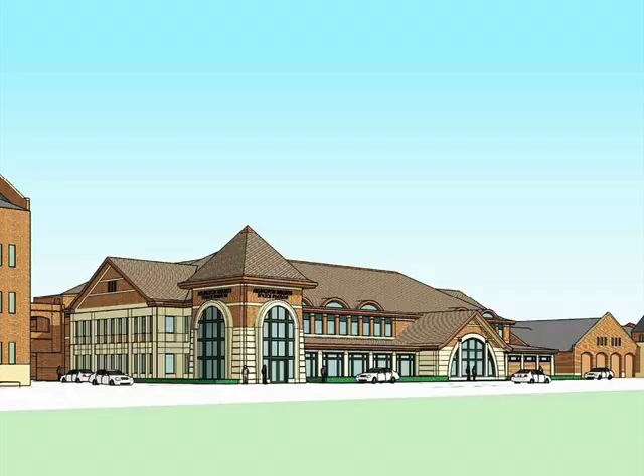Next, under new business, a very important item in the history of Arlington Heights: amendment to the PUD ordinances for construction of a brand new police station here in the village of Arlington Heights. A long-awaited evening for all of us involved in this process, particularly the staff, and so I want to turn it over to Mr. Recklaus, as the village is the petitioner in this item.

A couple of quick comments before I turn it over to the design team. This is obviously a unique situation where the village is the applicant, but I can assure you we stand by our rules and procedures, and we are following all of the same rules and procedures in the same manner that a private business would in an application. It actually was kind of a fun process in that regard. I think a few of the departments enjoyed being able to have Charles on the other side of the table and put him through his paces. But we're very happy with how this process has gone.

Charles and Deputy Chief Pecora, along with staff from police, planning, and public works, and our design professionals that we've hired, have put a lot of work into this. We've had check-ins along the way with Trustee Tinaglia and Trustee Glasgow, and what we have is what we believe to be a very efficient, very functional, very cost-effective facility that we think is going to fit in nicely with the neighborhood and serve our police department for decades to come. But with that, I will turn things over to Charles, who will kick things off.

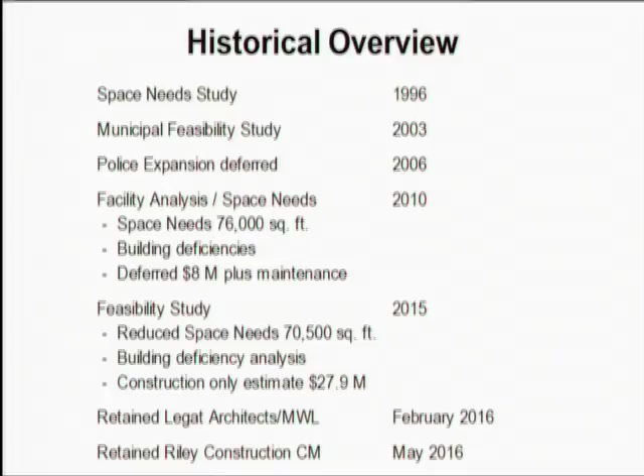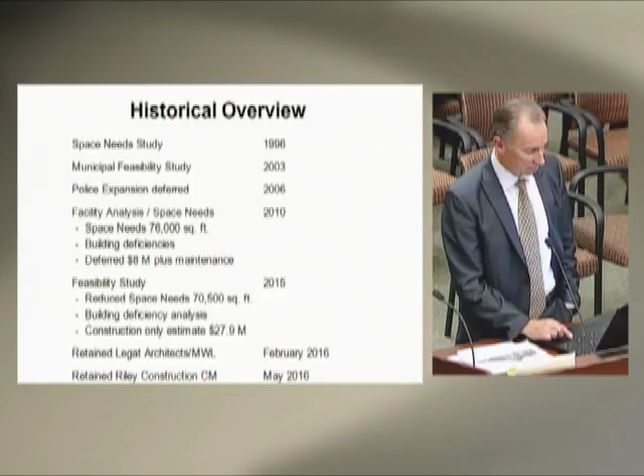The project was still placed on hold, and then an additional study was done in 2015. We were able to work with the consultants at that time to bring down the size of the facility to approximately 70,500 square feet of programmable area. Consultants at that time did concur with the building deficiencies that were identified in the 2010 study. Then last year, the board recommended approval of hiring and retaining Legat Architects and McClaren Wilson Lawrie, who specialize in police stations, and also Riley Construction as a construction manager.

So throughout all those years, we've had many, many meetings, public meetings with the neighbors. But more recently, I'll fast forward to December last year, we had a status report with the village board. We then went to a preliminary review with Design Commission and also subcommittee of the Plan Commission. Then in January of this year, we mailed notices to over 200 property owners, held a neighborhood meeting. And then also in February had the formal Design Commission hearing and the Plan Commission public hearing, and again did that same mailing to over 200 property owners.

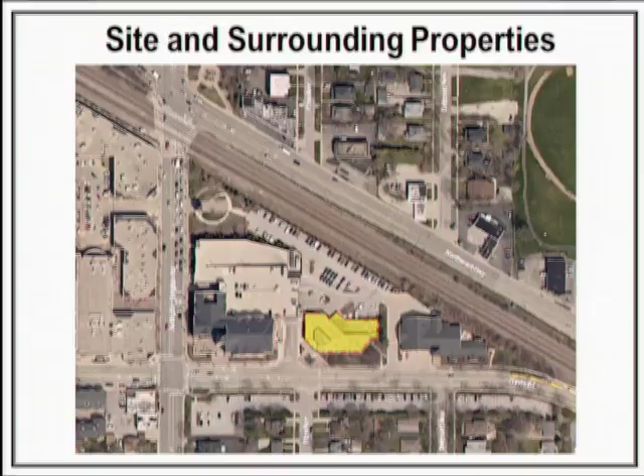The site, as you're aware, is constrained. It is bordered on the north by the railroad tracks. To the south is Sigwalt. This aerial identifies in yellow the existing police station that was built in 1978, and it is between the existing Village Hall and Municipal Parking Garage on the west and the new fire station on the east.

At this point, I'd like to turn it over to Deputy Chief Nick Pecora, who's going to talk about some of the deficiencies within the police station right now.

Thank you, Mr. Perkins. Good evening, Mayor and members of the board. It's my pleasure to present the next 5 slides. It'll give you a little bit of a story about how the police department has not met our needs for a current police station. As Charles just indicated, we're at 38,000 square feet, and our neighbors have built police stations that range between 70,000 and 79,000 square feet, and they have similar full-time employment.

When the building was built in 1979, 1980, we had 80 employees. We now have 139 employees that call the police department home.

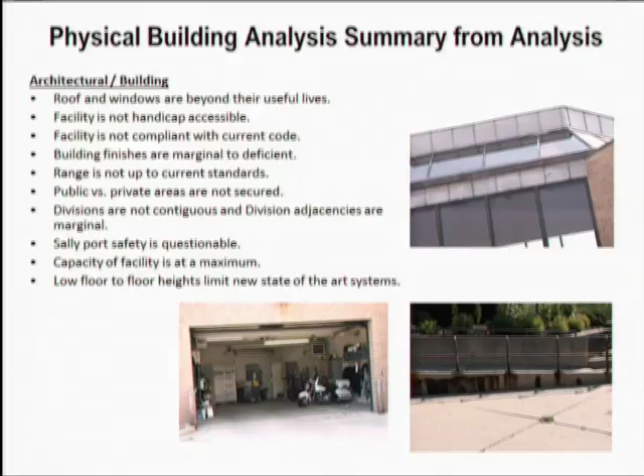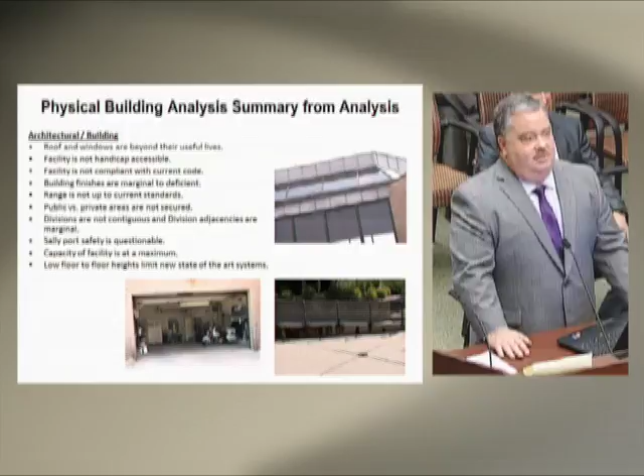The picture on the lower left is our sally port. That's primarily used by police agencies to bring in a squad car when there's somebody in custody. The garage door closes and then we escort the person into the lockup, which is the door in the middle of the picture in the back. You can see that we use the sally port for storage - there's 4 motorcycles in there, 6 police bicycles, forensic gear in the back, and ancillary storage on the left. It presents a unique problem when you have somebody that's not cordial, and there's lots of trip hazards involved, and it doesn't benefit us well to have that gear in there.

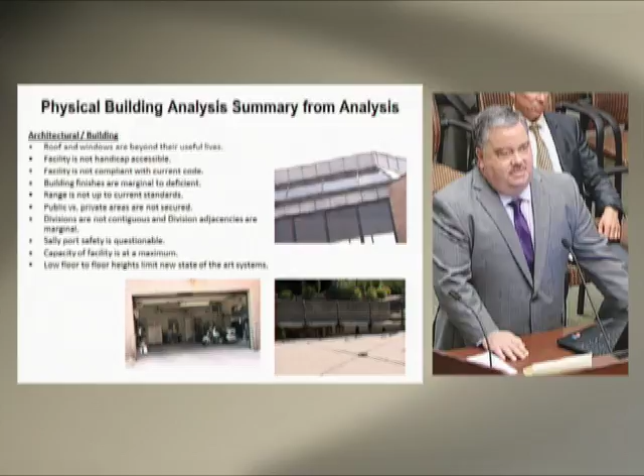The picture on the right, that is our front approach. That's the only handicap accessible point that we have in the building, and you can see the railing is starting to rot at its post.

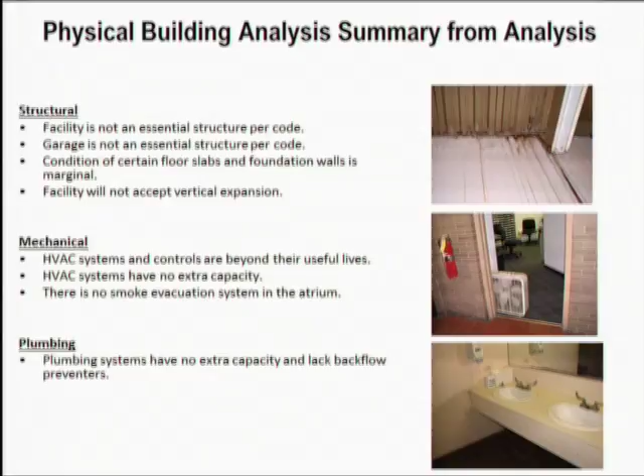Last year, we started to smell sulfur in the building, and we found out that the ventilation stacks were cracking. Instead of venting the sewer gases out through the roof, it was venting out into the building.

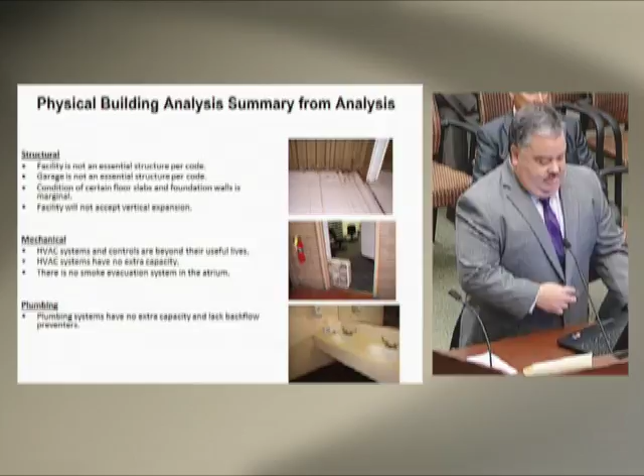This picture shows, hard to see, but you can see the spaghetti in the ceiling. When we started running the technology through the building, there were no wire trays, there were no chases. So the low voltage contractor that came in popped open the 12 by 12 tongue and groove ceiling tiles and was unable to put them back. So we have numerous holes in the ceiling so the contractors can access the wires should we need another network drop.

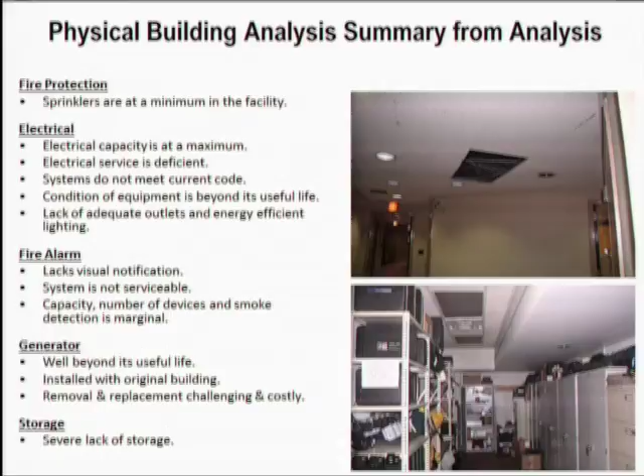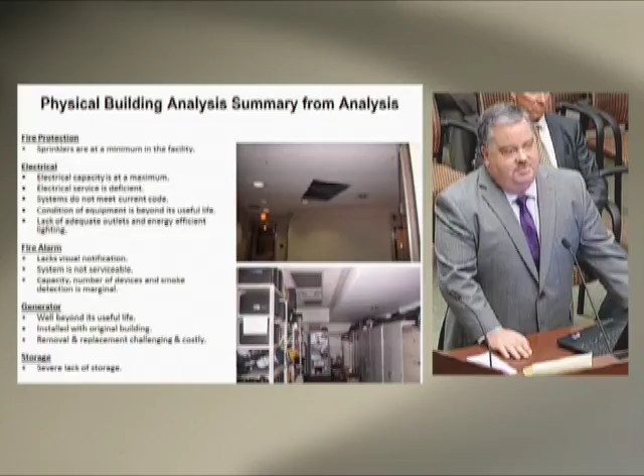And this picture on the lower right-hand side is the last 10 feet of our roll call room. It used to be 30 feet long. As we introduced more technology and needed storage, we took the last 10 feet and built a storage cabinet. It's technology like the AEDs that you see in there, they weren't around in 1982. Portable breathalyzers, portable laser, speed control devices, technology we need to keep secured and make sure there's accountability. We had to build a storage room.

Repurposed room, upper right-hand corner. When I started, that used to be the dark room in the lockup. When we used the old black and white 4x5 negatives to take booking photos, they were developed back there, and then the black and white photos were developed there as well. With the advent of digital technology, we didn't need a dark room anymore. So we plastered up the door in the lockup and cut a hole into the wall, into the hallway, and now this is our traffic unit.

Around the partition there, that's the sergeant's area, and the area here in the foreground, we have 3 police officers and 7 public service officers that call that their workstation. You can see the crude ventilation system we have there, a portable air conditioner that's vented somewhere up into the ceiling, and then the exhaust is then put in front of, or the air conditioning is then put in front of the fan and then circulated around the room.

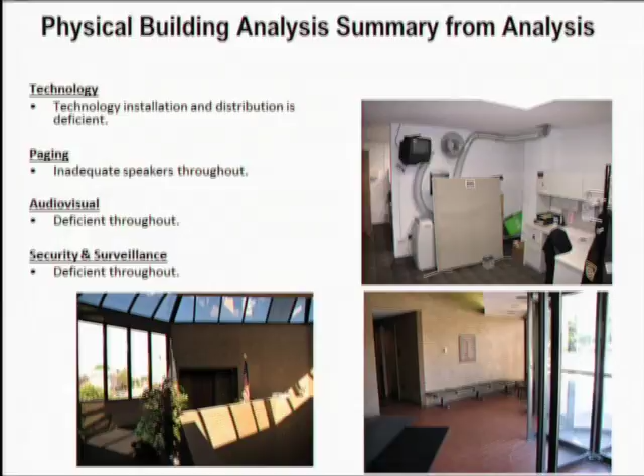The picture on the left is our second floor atrium. It just shows that the windows are starting to fog up a little bit, a little hard to see in that picture. Just more how the building is starting to degrade. And the picture on the right is our lobby. The revolving door and then the window curtains on either side of that are starting to lose their structural integrity. And when it rains, we get a lobby full of water.

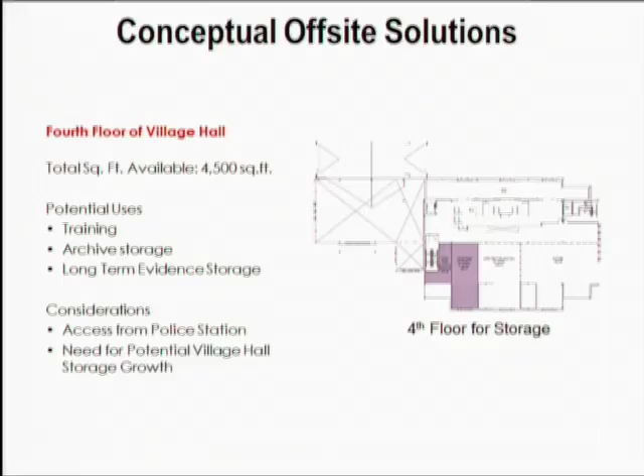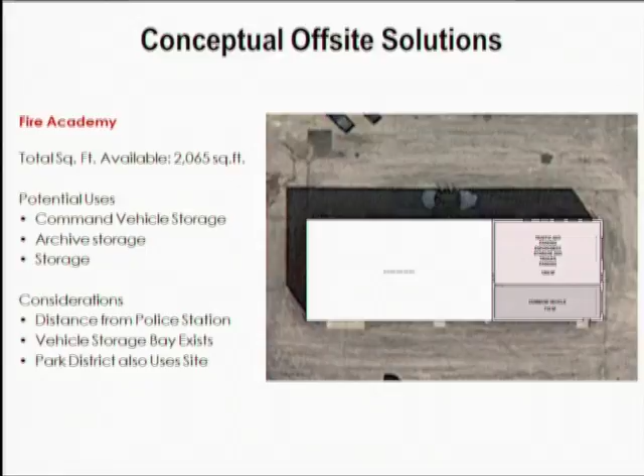These goals are on our website as part of the study, but I wanted to highlight them again this evening. We were charged in that 2015 study to look at using some of our existing facilities, and there are still 2 small components of this project where we're doing that. We're currently designing and bidding renovation of a portion of the 4th floor of this building to allow for archival and long-term evidence storage here, and also off-site in the former Fire Academy building, now called the Police Annex. We'll be renovating that space for seasonal vehicles, motorcycles, and additional archival storage. That allows us to bring the square footage of the building down from the 2010 study to what we're proposing today.

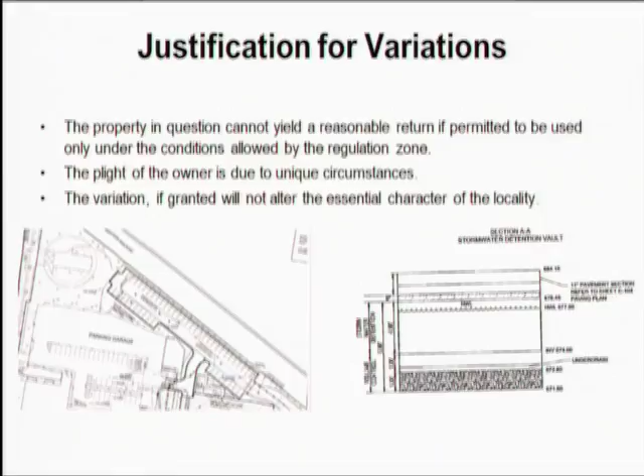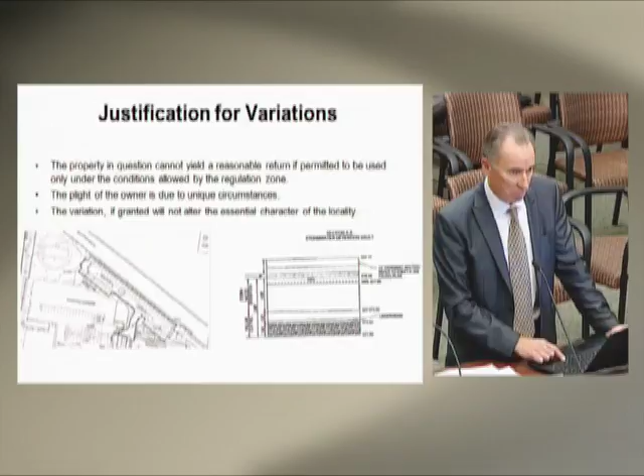There will still be a row of landscape trees along the railroad tracks as there are today; those will be replaced. But right now this site has zero on-site stormwater detention, and as part of this project we'll be providing stormwater detention and some regional benefit for the neighborhoods to the south.

This exhibit shows the proposed footprint of the building between the existing fire station and existing garage. The main change people will notice is the reconfiguration of the driveway. Currently there are 2 exit lanes and 1 inbound lane; we're proposing 1 exit lane and 1 inbound lane so we can make the building a little wider and provide a sufficient sidewalk from the parking area for customers who park in the garage to reach the front door of the police department. Right now there's about a foot-wide sidewalk, if you can call it that, by the stair tower of the municipal garage. It's not very friendly for the public who park in the garage to reach the front door. There are also numerous conflicting traffic movements for anyone entering the garage, and this actually cleans up that traffic movement for customers coming to our building.

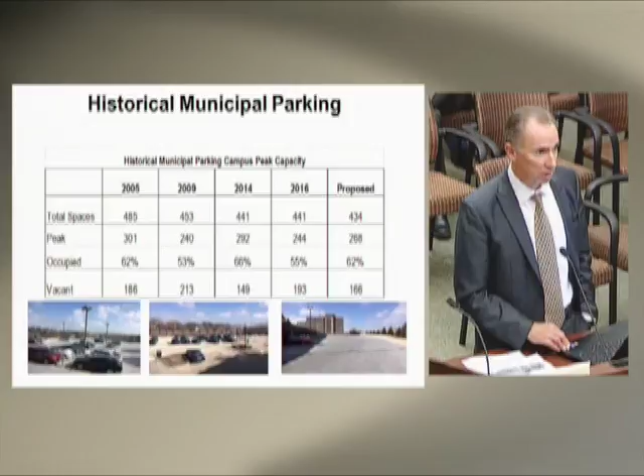On the bottom line here, you can see in each scenario there were hundreds of parking spaces still available. In 2005, we had a higher parking count and higher occupancy. That was prior to the Vail Avenue Garage expansion occurring, when there was a large shift of commuters from this building to the Vail Avenue Garage.

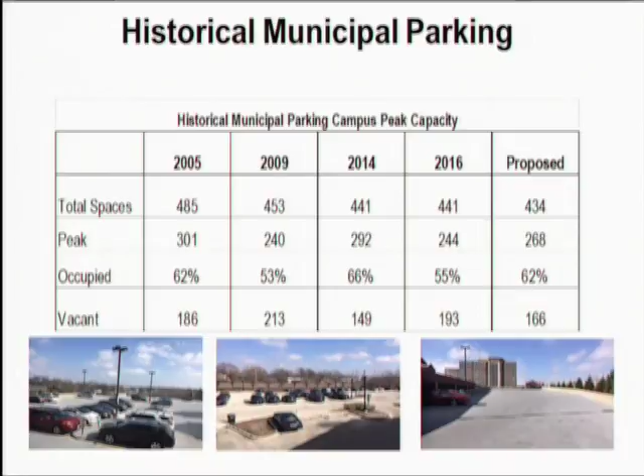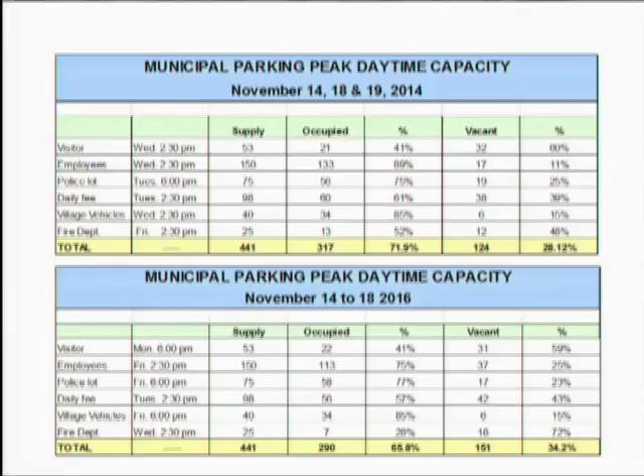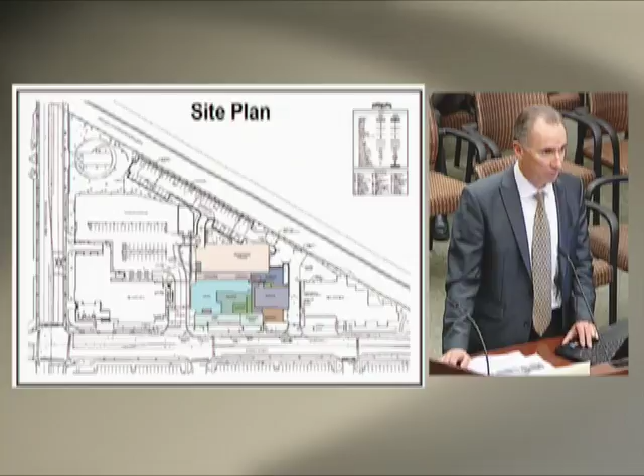Also, keep in mind that not all department employees are on site at one time. The peak shift, day shift, is 60. In the most recent studies in 2014 and 2016, we took, again, a worst-case scenario. We assumed every different parking area, so visitors, employees, daily fee, they all were at maximum, even though they were at different times of the day, and we assumed that was the peak maximum, and we still had 124 and 151 vacant spaces.

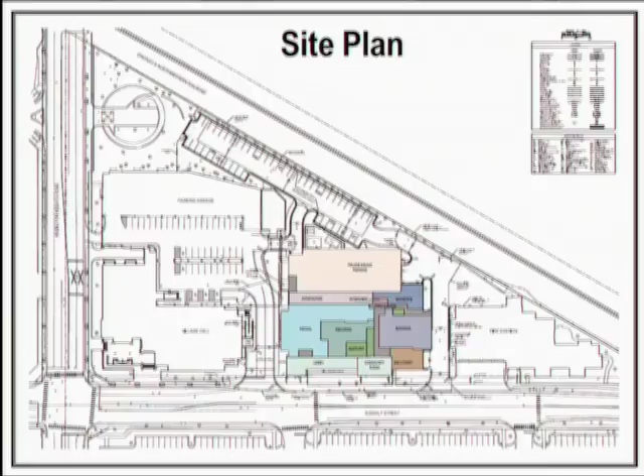Good evening, everybody. As you can see, the site plan has not changed significantly since we last presented to you a couple months ago. As Charles mentioned, we are using every bit of the site as we possibly can to fit the building on. We have rerouted the driveway into the parking garage, straightened it out and pushed it a little bit to the west, which would allow our building to expand as far to the west as we can. And we've done the same thing on the east side, the road between the police department and the fire station building. So we've expanded completely west to east. We've held it just north of the Sigwalt setback line, and we've managed to fit everything on and meet the program.

The one thing that has really changed since we last presented to you was that we have determined, after a lot of analysis, that the existing stair tower in the southeast corner of the garage is remaining. We had done numerous studies of using it, not using it, taking it down, et cetera. We determined it's best to leave it. So the police department staff will enter the building from that stair tower, but at the same time, there will be complete separation from the public, doors and access and all that. So we feel that's really the only thing that's changed significantly.

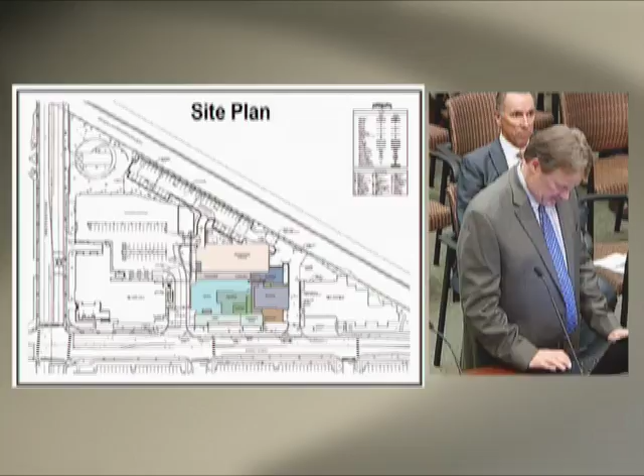Starting with the floor plans, I'll go over these briefly, and we can certainly go back to them, but I know you've seen these before.

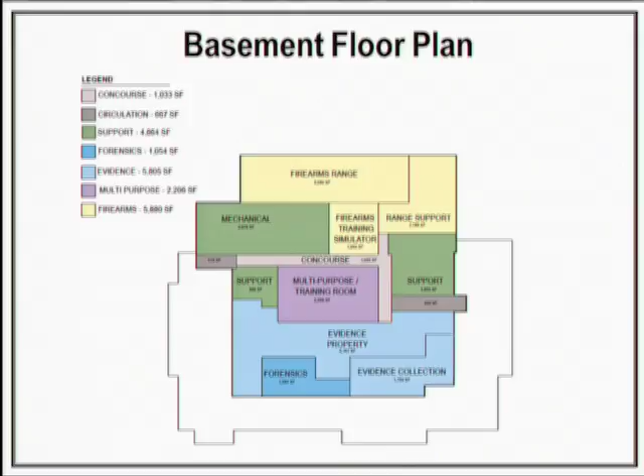The concept has stayed the same, where the basement is really sort of the training area, so we've got a multi-purpose training room down there. Most of the evidence is down in the basement. In the upper right corner, when we get to the first floor plan, you'll see the evidence intake, but most of the evidence is brought down through a secure elevator and stored along the south and southeast corner of the building. We've got mechanical space. The firing range is basically underneath the patrol vehicle storage, range support spaces, and storage.

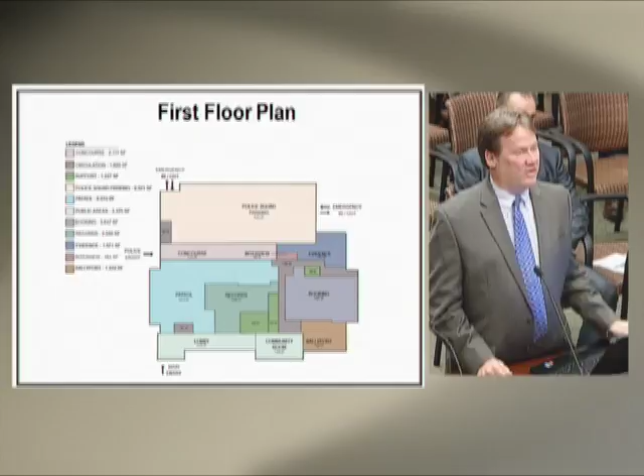It sort of fits in, being kind of the middle building, so it's set down a little bit, but it's a very welcoming, inviting space. The element will be lit up at night. It'll give a different look. Like if you pull in here tonight, the police station is virtually dark. We want the police station to read as a beacon. So the front lobby that you see across the screen there, the community room, and that main entry will all be lit up at night and provide a very nice environment.

You can see patrol takes the left half, records to the right. We've got the booking area, all the jail cells, if you will, the Sally Port at the southeast corner. Doors are facing east to the fire station. We're going to make those historically correct doors, since that will be visible from Sigwalt Street. As I mentioned, the evidence is up in the upper right corner, and the doors are facing north. And there is a concourse that travels west to east, separating the police parking squad area from the rest of the building.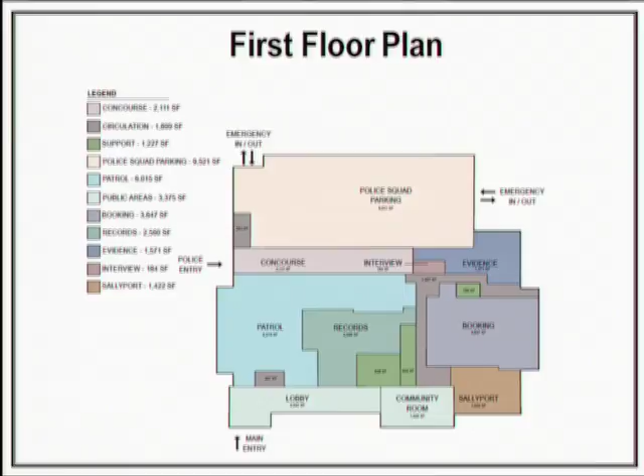Moving up to the second floor, over the parking structure, we've got the men's and women's locker rooms with the fitness room between them, with natural light looking to the north.

We've got a smaller version of that concourse upstairs, and then the administration area takes the bulk of the southwest portion of it, with the detectives or investigation area along the right side, and community services facing east towards the fire station. We've got a break room and break area that will serve the entire facility upstairs.

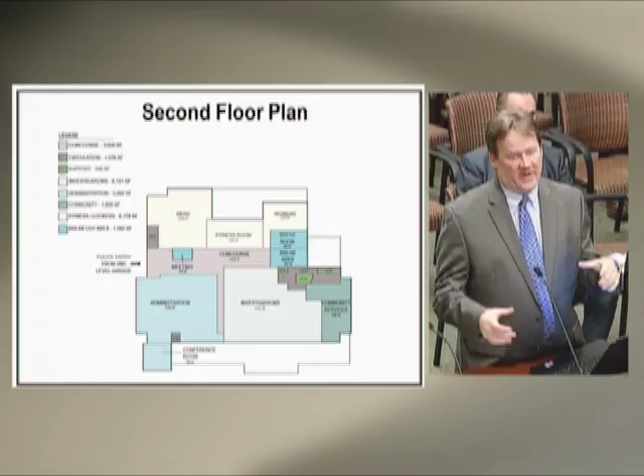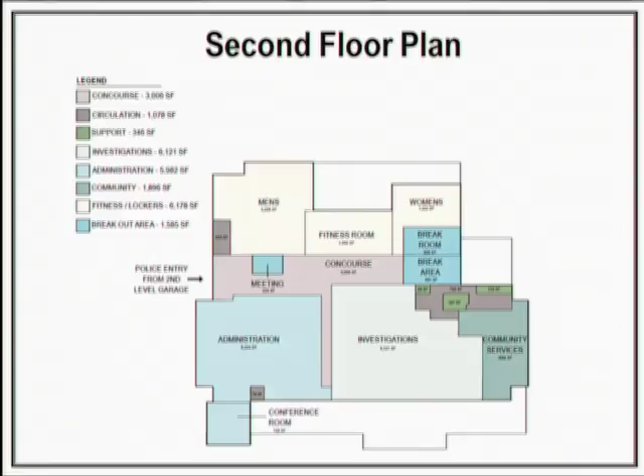You can see the space that doesn't really have any color - that's the roof of the lobby area below. The tower element comes up 2 stories, and we've provided the second floor conference room in the tower, and then the rest of the area is just a 1-story space. Roof plan, I think that's fairly self-explanatory.

I think I can turn it over to Steve now to kind of talk about the style and the context.

Hello, as you can see, we're trying to design a 2-story building that's going to sit between a 4-story village hall and a 1-story fire station. The massing of the fire station with the taller roofs brings it up to about a story and a half visually, and the towers in the village hall bring it up to feeling like 5 stories.

So what we're trying to do is create a building that is complementary but contrasting, just in the materiality, so that the stone, brick and roofing have similar features to the existing campus on the east and the west. But rather than give it a consistent look that makes every building feel like a carbon copy of one another, we're creating the historic look while giving it a unique character, using the arched forms, the sloped roofs, and the roof massings.

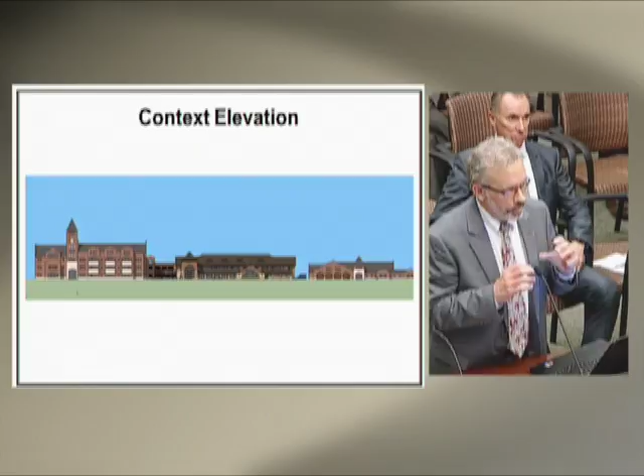We're trying to take a building that could have been a very tall 2-story building and break it down into scale by having a 1-story lobby along the street on the south on Sigwalt, a 2-story tower, and then the building behind, which is 2 stories, with the roof sloping away to keep the volume down.

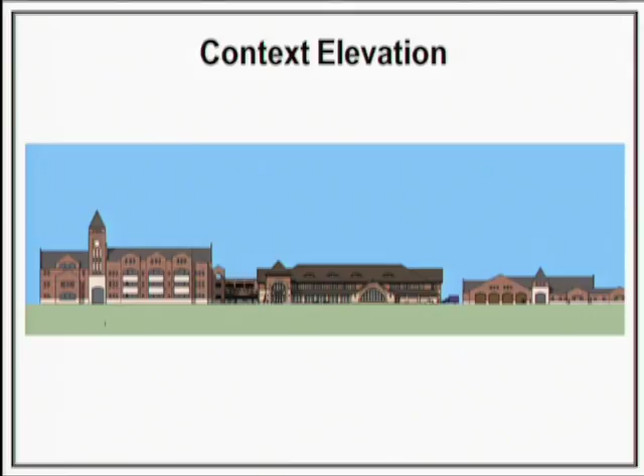I actually can't read these numbers, but I can tell you that the height of the peak of the roof is about 51 feet. We're 24 feet to the underside of the eave, and 33 feet to the underside of the eave of the tower. We're keeping the entire building below the height of the 4-story volume of the village hall to its west.

And you can see that as you're going around to the east elevation. I actually want to go back and explain these elevations too as well. From the south, this is the view from Sigwalt. The tower is 2 stories, with an entry and vestibule at the bottom, meeting rooms on the 2nd floor, and a sloped roof above.

The larger arch shape that you see to the right in the south elevation is the big meeting room - it's a 1-story space with a taller ceiling. The area in between is a 1-story lobby that connects the 2 volumes, and the remainder of the police station activities are in the 2-story area behind it. There are some eyebrow windows bringing light into the open plan offices, which are falling behind the office windows on the south.

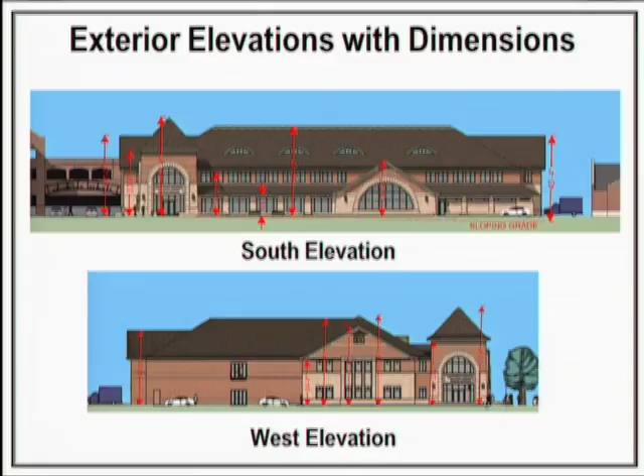On the east and west elevation, we're treating it similarly with the gabled roof, with windows aligned with a symmetrical bay at each end. So you can see the east and west have a similar look in the gabled area. Now, as you go to a certain point beyond where it's less visible from the street, we're using more masonry in the back of the building and less stone.

On the north elevation, we're using roof volumes that are visible from afar, from the distance, from the north, and from the railroad tracks. But you can see that the simpler volume at the bottom of the drawing in the north elevation is the squad car storage garage area.

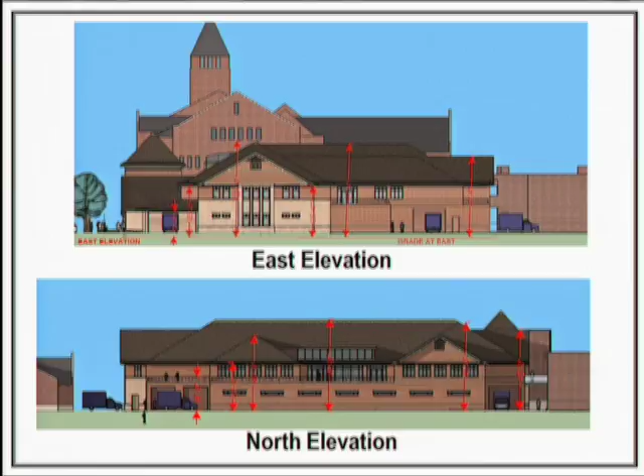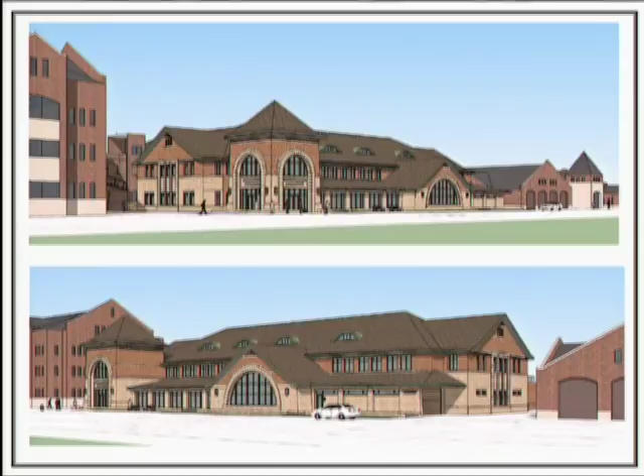To the right is another gable form. As you can see, the building is stepping back. The face of the building you see is aligning with the 10-foot setback, and then the rest of the volume of the building is 15 feet beyond that.

So we're trying to avoid having a tall volume right up against the setback along Sigwalt. The view from above gives you a better sense of how it's broken up: essentially a large rectangle in the center with a lower one-story volume in the front, and two wings in the back for the locker rooms and the workout area in between.

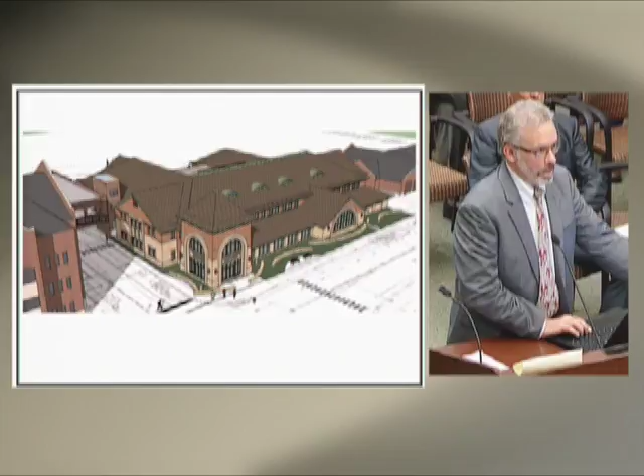We've got heavy landscaping, and the planter walls are doing more than just being decorative. We'll have lots of plants around them. The walls will be a backdrop, but they're also creating a security barricade without looking like one. We've been able to prove from past projects that they've been very important in stopping certain attacks on police stations.

The view from above shows the tall central volume in the middle, with wings coming out separating the men's locker area on the upper right from the women's locker area on the lower left, and a common workout area in between. You can see the police garage is the volume at the lower right-hand corner that we're building over the top of, which allows for future expansion if needed.

And then, do you want me to keep going on landscaping, or just keep going?

Briefly, we're landscaping the site fully. The setback line is the area between the paved sidewalk—actually, a heavily landscaped area is the setback zone. And then we've recessed back the lobby a little bit from that area.

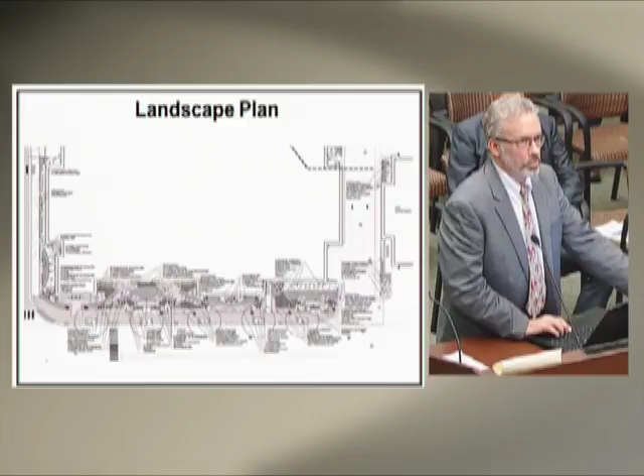We're landscaping on the east and south predominantly. And as you go around to the back, we're putting a rock garden with some planting underneath the garage edge, and then we're screening around the mechanical.

The mechanical area in the back is actually not going to be tall walls, but is recessed into the ground with a grill over the top. And we're landscaping the back very heavily with a row of trees along the railroad tracks as well.

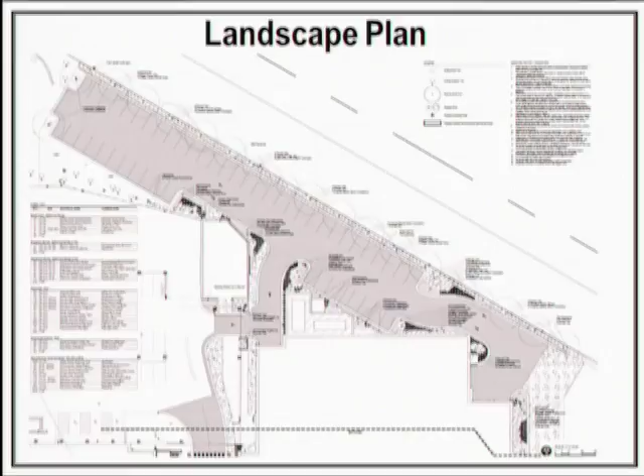Some of the amenities: we're basically taking the streetscape that exists on the two other buildings and bringing them so that it's very consistent and uniform along the front of the new police station. We're showing some of the elements that'll be used that repeat those forms.

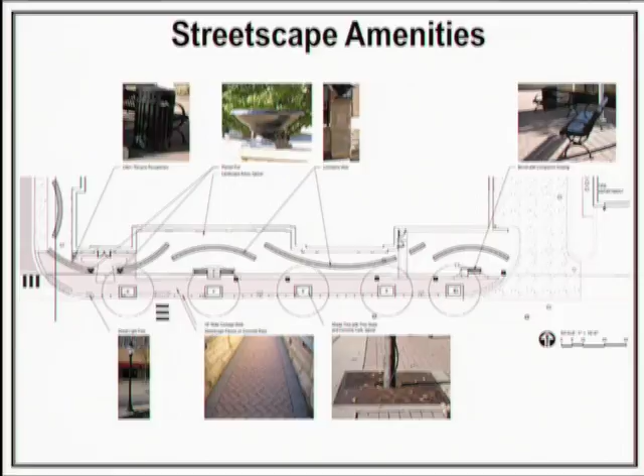And now I will let you hear from Kevin Matre, who will talk about the civil engineering and the grading for the site.

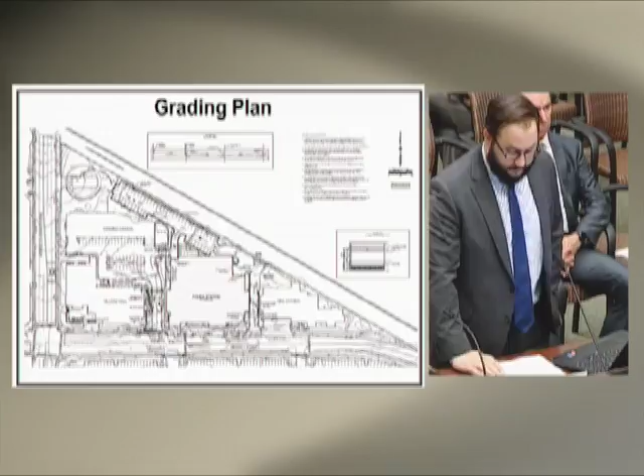Good evening. I'd like to briefly touch on a few of the civil aspects of the design, starting with the grading plan. The grading was basically set in order to get a finished floor of the building that is both accessible and meets the existing constraints of the site. As we spoke of earlier, it is a tight site—on either side we have existing buildings, the railroad tracks to the north, and Sigwalt to the south.

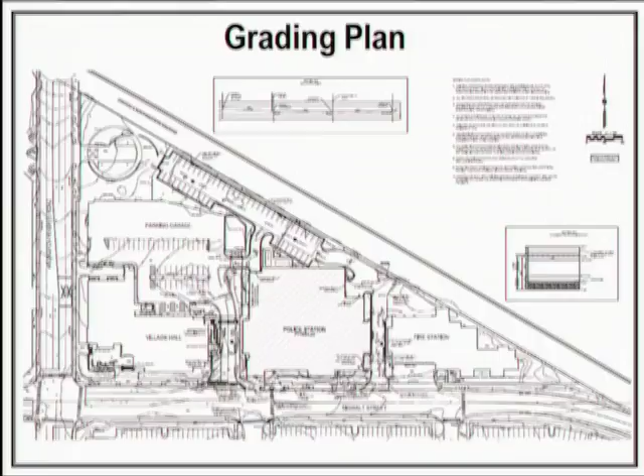Along with that, we're also maintaining drainage on the site, so we are sheet draining away from the buildings to either stormwater inlets and sewers that lead to the detention vault in the rear, or directly into the detention vault if it's in the parking lot. That detention vault will be located in the north parking lot behind the building—it's really the only available area to do an underground detention vault for this site, so it'll be long and narrow up there underneath the pavement.

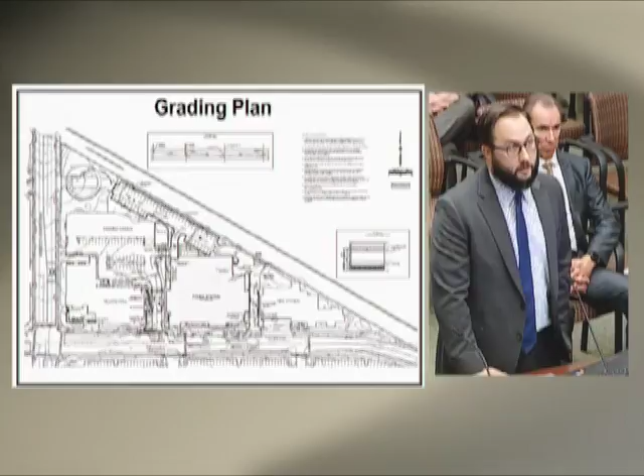It should be noted that the municipal campus currently does not have any existing stormwater detention or stormwater management for the site. So not only will we be meeting the MWRD and Village of Arlington Heights ordinances, we will also be providing a bit of a regional benefit by controlling that rate of release from that area.

Moving to the utility plan, the site will be served by a sanitary sewer existing in Sigwalt. It is a combined sewer where we will provide a service to the southeast corner of the building. The water service will also come from a main that exists along Sigwalt and will travel to the northwest corner of the building, serving the drive aisle between the Village Hall and the police station.

All stormwater downspouts from the building will be collected and conveyed to the detention vault. Existing infrastructure on site, gas, electric, telecom, will all be provided through the infrastructure that's currently there. Everything will be maintained to the existing campus as is. Anything that needs to be rerouted or redesigned will be.

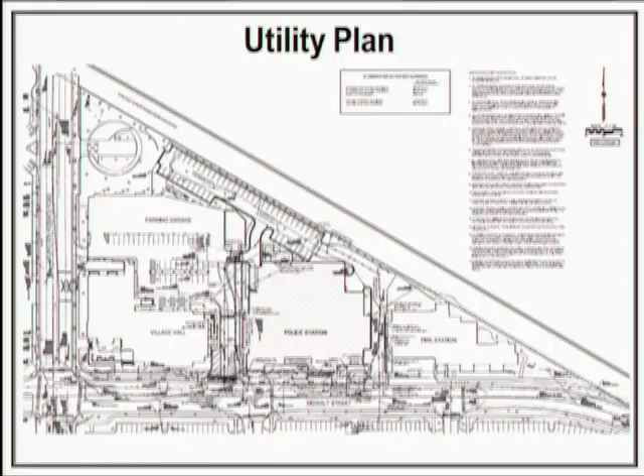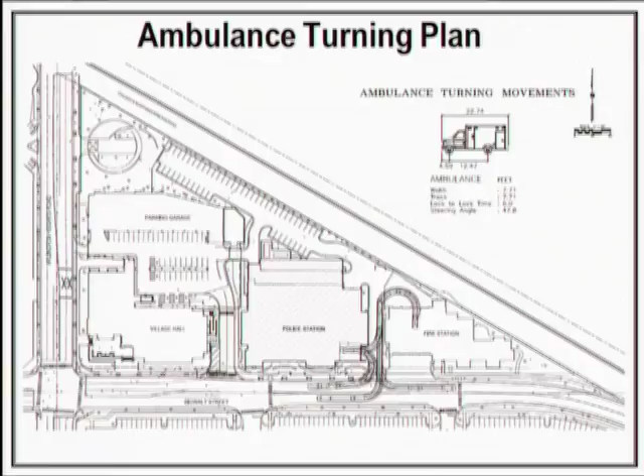We also took a look at site circulation. Here's a couple of quick slides where we looked at both emergency vehicles and passenger vehicles. Here we have the typical movements of the ambulances coming in and out of the site. This is the typical turning movements of the fire trucks coming in and out of the fire station. And these are the anticipated movements of the police cars as they come into either the Sally Port, the garage, or the parking lot in the rear.

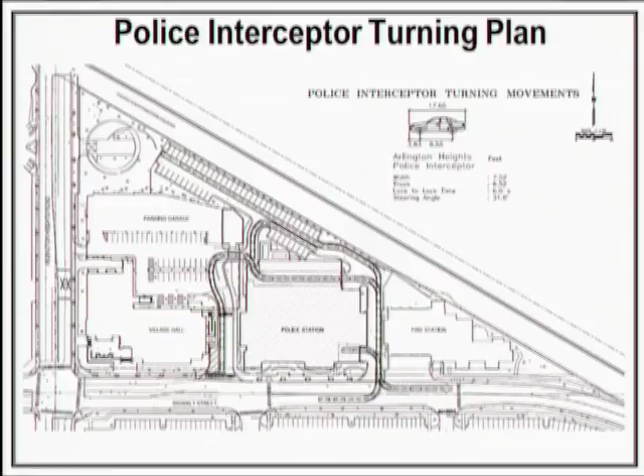I'll now turn it over to Chris Seifert, who will talk about the construction staging plan.

Good evening, and thank you for allowing us to present today. The staging plan for construction, we've set it up to try to control as much of the site and take a good view and keep the operations of the campus going at all times. The biggest thing we're going to need to set up is a staging area, offices directly across from the proposed police station on Sigwalt Street.

And yes, that's taking up some of the parking, but we feel it's critical that we can be there so we can see what's happening with the fire station and what's taking place in those activities. We're proposing to get radio so that we have emergency call and then people can jump out very quickly to control traffic if necessary in an emergency situation.

The plan is to bring all traffic from Arlington Heights Road, either north or south onto Sigwalt Street and then into the construction area, with no construction traffic allowed further east on Davis Street or further south into the neighborhoods. Additional overflow parking will take place further to the east along Davis Street up until about the sign, wherever we pick that, working with staff on what that'll be.

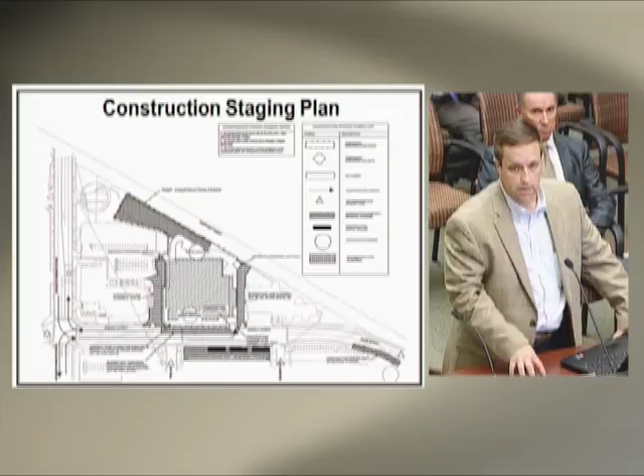Also part of the plan is to build the parking garage for the police station as quick as possible to provide some on-site staging and covered storage for construction materials. There will be some intermittent lane closures required along the westbound lanes of Sigwalt Street, as well as the drive aisles between Village Hall and the police station. We're going to do our best to minimize and contain those to the shortest durations possible, but they are going to have to happen for the utilities that go in. So, thank you.

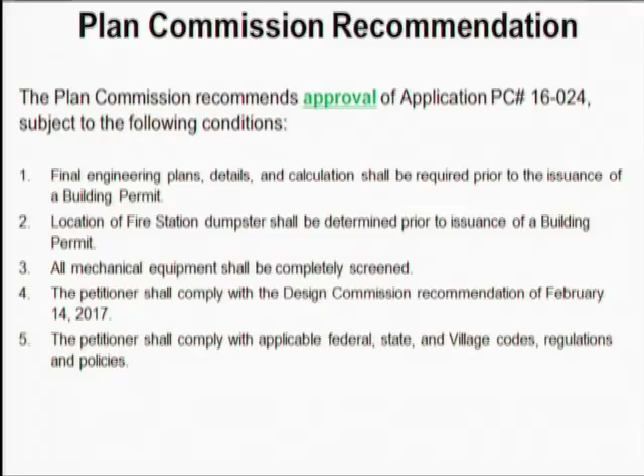Well, thank you all. Clearly a very team-oriented project and very exciting, very impressive building, and thank you all for your involvement to this point. So, questions from the board?

Let me go down here to Trustee Glasgow. This has been an outstanding presentation, Charles. You were talking about private businesses and how you exceeded anything that I've seen in probably the past 2 or 3 years for a private business. This has been very, very thorough.

I'm not going to reiterate what you've already presented. I think most of the people at home have gotten to see over the past 25 minutes what we on the police station committee have gotten to look at over the past 2 to 3 years looking at this. But there's a few things I just want to make sure we talk about. You don't want to hear me drone on and on at 9:45 this evening.

There's a few things that I don't think Deputy Chief Pecora hit on, and that's officer safety with regard to this building. There's a lot of officer safety issues, a lot of things that are not up to code. There's a lot of things with regard to the lockup that is not up to code. There's been some substantial changes in forensics laws which require storage forever.

Computer use for solving crime, computer crimes are things which we have not even begun to touch on, which this building cannot be utilized for. And the security and surveillance of the officers are things that are incredibly important.

When we sat at the January 18th meeting, Nick and Charles, we talked to the residents that came in, and they didn't have any questions or true concerns that I was made aware of during the course of the conversation. Charles, if you'd like to address that.

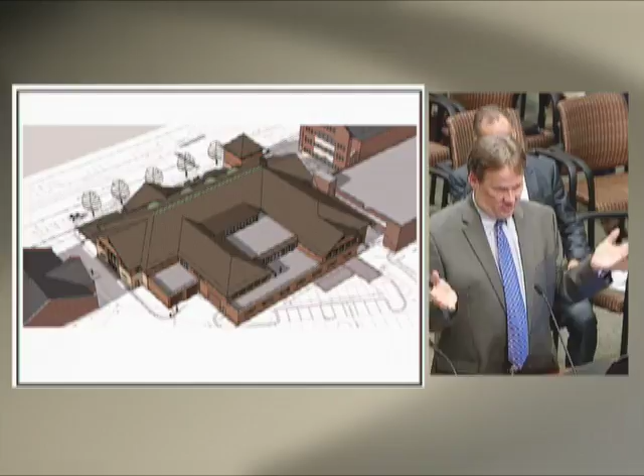Both roofs would be flat, but we mean 'flat' in quotes—there'll be pitched insulation. We're going to keep the roof deck level, with pitched insulation and roof drains up on the roof. In that northeast corner where Charles pointed, if we're able to do that as a roof deck, you'll have the regular roof system with roof drains, and then a set of pavers on pedestals, 6 to 8-inch high legs, and that's how you get your rooftop. There are no joints, no mortar between them—the rain just goes down through the standard roof system, through the drains and out of the building. The main portion, yes, there are people shown there now; we should probably take those off, but that's future expansion. In theory it's the same roof deck system, but right now you'd see multiple roof drains in there, with insulation pitched to the drains.

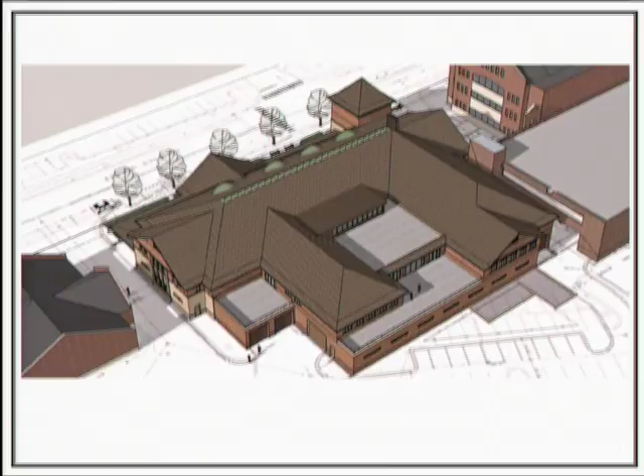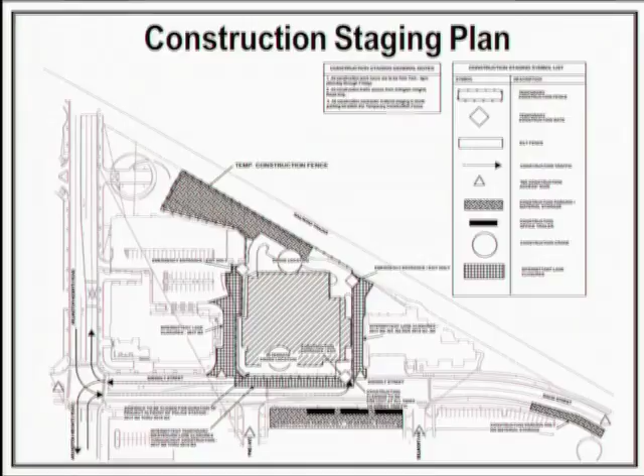Okay, thank you. I have a question about the construction process, the staging part of it—there was discussion about possible westbound lane closures on Sigwalt. Will this require any vehicle detours? It is quite possible. We're going to try and work with staff to minimize that whenever necessary, but there are certain utility tie-ins we have to make into the sewers and streets that Kevin talked about, 8 to 9 feet deep, so I can definitely see some lane closures. We're really trying to avoid full lane closures on Sigwalt because of the fire station and access, so we're trying to avoid that if we can.

Okay, and also I'd be concerned about the residents who live in the area, that they have access to their properties. So I would hope there'd be some notification to the adjacent residents if there's a closure.

Absolutely. We'll be in their backyard so they can come knock on the door. Okay, that sounds good. Thanks.

I'd also like to ask about the straightening of the drive aisle into the parking lot. I want a little more explanation of how it's changing, because when I look at the pictures, not being an architect or an engineer, I'm having trouble seeing how much different it's going to be. It's a good question.

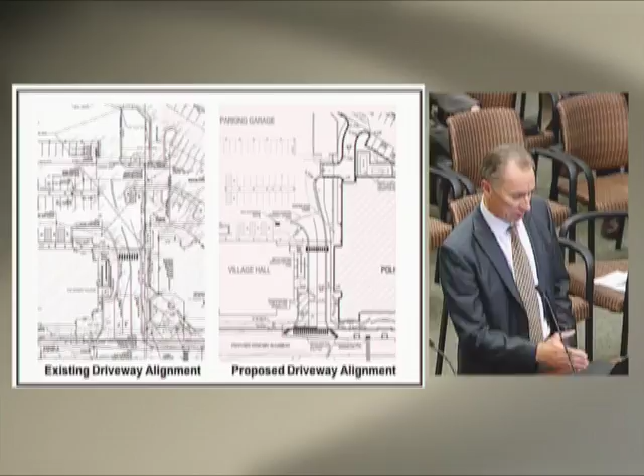So that does a number of things. It allows for better pedestrian connection and access to the police station. It also cleans up the access point into the building.

If you look at the exhibit on the left, when customers come into our building, and I see it many times, they get to this point and get confused because there's a drive here to the right that goes to police, but it's not really clearly delineated. There's another two-way drive at this point, as well as the drive aisles to the west for the actual parking garage.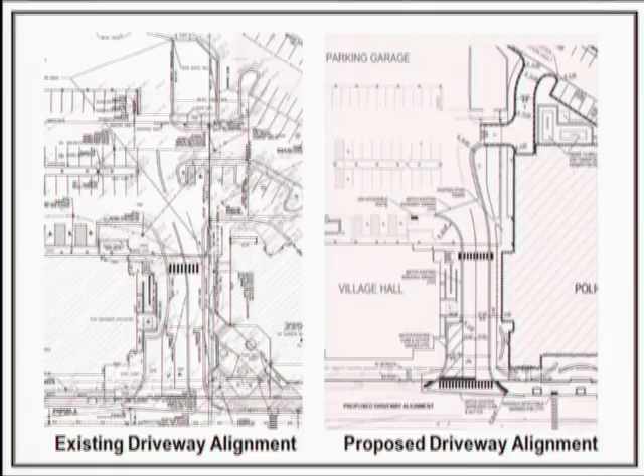Under the new proposal, you come in and have a nice clean access point all the way through to this point, and this is an exit only, so it's very obvious they can't turn right at that point. This really helps customers coming to the building, especially the first time, or if they're elderly and coming to see senior services or health services and are unfamiliar with the garage. This makes access into the garage a little smoother for them.

Okay, thank you. Now I understand it a lot better. I appreciate that explanation. Thank you.

I have one last question about the lobby lights and the concern about having it look inviting. But on the flip side, is that going to create any spillover or effect on the residents that live nearby?

I'm glad you mentioned that. That was a question some of the residents had about lighting, and we indicated to them that the lighting would be sensitive. It's not going to be Las Vegas or anything like that. It will be internally illuminated, but done very tastefully so that it does not provide glare or spillover onto the residents to the south by any means. That's not the intent of that.

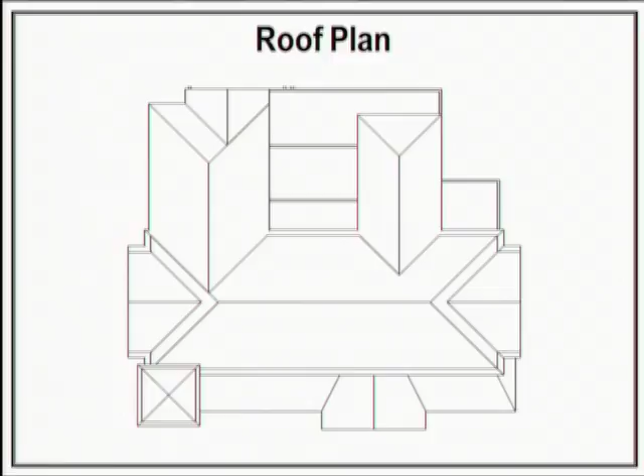Okay, all right, thank you. That's all I have. Thank you very much. Trustee Farwell. Thank you, Mayor.

First of all, I too would like to thank the committee that put this together, and I'd like to thank Trustees Glasgow and Tenalia for your generous donation of time in helping oversee and being the board's liaison through this entire process. I can't think of two trustees who could have done a better job, and I really thank you for that. I'd like to thank especially Tom Keeney, who has not been mentioned yet this evening, but he's been instrumental in trying to figure out the financing part of this.

He's not here this evening, but I do want to personally recognize him, because if it weren't for him thinking outside the box and being able to take advantage of our bond ratings and retiring things early, kind of gearing up for something like this, we wouldn't be able to do this. So I'd like to thank him even in his absence.

Charles, this has got to be the best presentation I have seen in, well, I can't tell you how long. You hit everything, and it was fantastic. I don't have a single question on something this major. You've answered everything, and I have a feeling this is why this building is so successful. The architects are great, but you've been driving the bus, and it proves to the caliber.

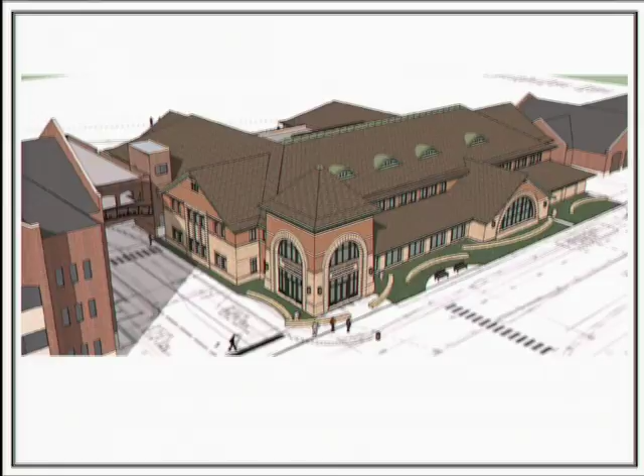So is there a real need, I don't know what the cost is, to have that side decorated that way on the west side? Yes, we feel it's an important design feature for a couple of reasons - one, to get light and visibility into the building, but also that's where the front desk is, so they have direct visibility out of the building as well. Okay, just trying to save money.

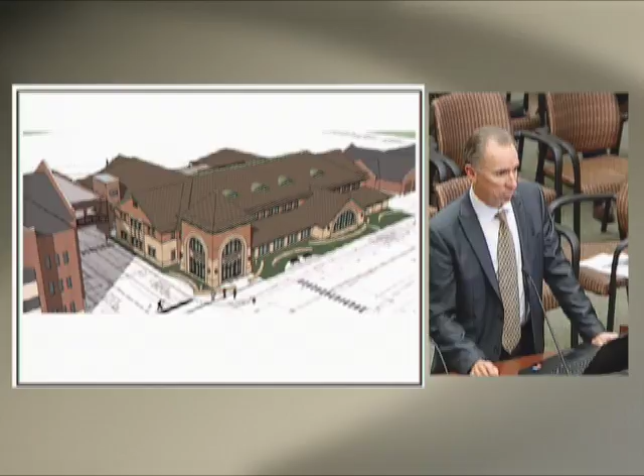All right, thank you, Trustee Blackwood. Just one question - when it comes to security, I really like the idea of having the barrier walls, but I'm not exactly sure how they function, how deep they are. Is it just a deterrent, or are they probably 2 to 3 feet deep, all stone?

If I could, we try not to go into too much detail in public for the security features of the building. Okay. Could I get that information after the meeting? We'd be happy to fill you in on some of that, one-on-one, later. Okay.

And on the barrier wall, on the far east side, will there be one, or is the one in front of the far end of this building the last one?

So this is the last one at the east end. Then you have the access driveway. So there isn't any entrance into the building on that side by the access drive then? There is a bailout entrance and exit for anybody coming to the building to post bail. That's the only entrance, and that will be secure and monitored as well.

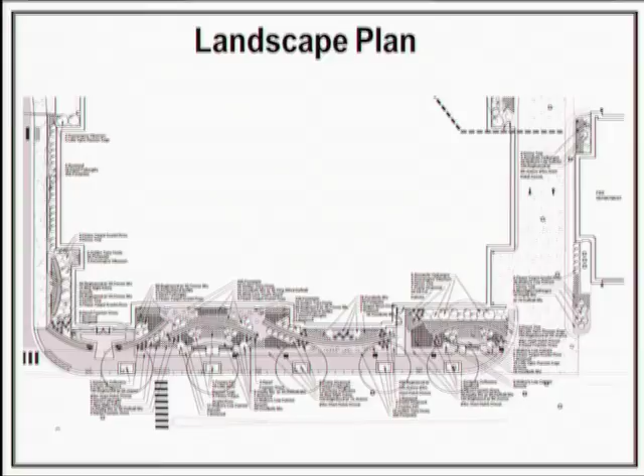Okay, thank you. Trustee Scaletta. Thank you, Mr. Mayor, I'll make it quick. Appreciate all the work that the committee did, including trustees Glasgow and Senalia. Deputy Chief Pecora, I'm glad that you, as much as I've seen all the pictures and we've all taken tours

of the police department, I was fortunate enough last year to take the Citizens Police Academy with my wife, and in the very beginning, I was kind of anonymous. Nobody knew that I was a trustee, and it was just amazing watching all the attendees of the class go through the building and just marvel at the conditions that the officers were working in, and many felt very sad for them.

At the same time, kind of the line of Trustee Farwell, that this has been a long time coming. I'm not only proud that we're making this, we're taking this next step, but at the same time that we made a decision many years ago to only make the absolute necessary repairs to the building. So there are a lot of issues that the current police force and staff have to live with, and so I thank them for their patience.

I'll thank the neighbors in advance for their patience, and urge the construction team to be the best neighbor that you can be, and not disrupt the lives of the neighbors. I hope that we're continuing to look for grant funding wherever we can.